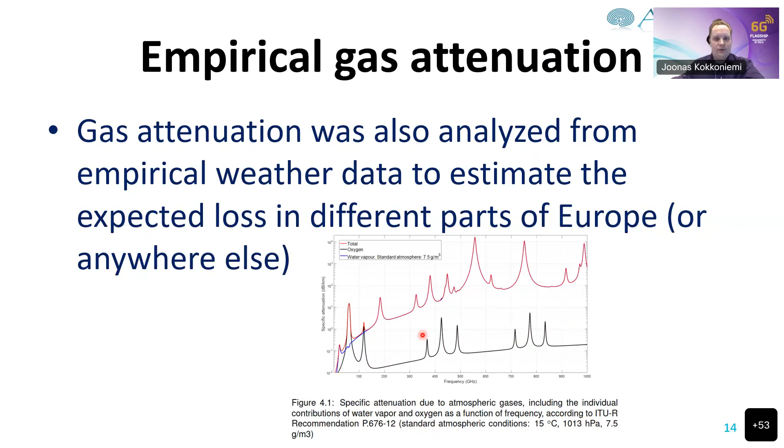But then UPM were really looking at the gas attenuation from the empirical weather data point of view. They really look into the historical weather data and see what kind of average losses we could be expecting on the long distance links. So these are mostly applied to European locations, but of course this could be anywhere on the planet. We do a similar kind of analysis. I picked Oulu because I'm from Oulu. So this is a little bit small, but we can extract weather data. This is from January 2018 all the way to January 2020.

So if we look at this, we can see that temperature, relative humidity, pressure, and your water vapor densities are changing on average. So during the midsummer, you tend to have higher temperature and higher humidity compared to the midwinter, for instance. So this will have a great impact on the specific attenuation, as you can expect. So even up to tens of dBs per kilometer difference.

Now, of course, the shorter the link, the less important this variation is. But for long distance backhaul links, for instance, we have shown in this project, but also in the previous project, that these kinds of even 1 kilometer links are possible.

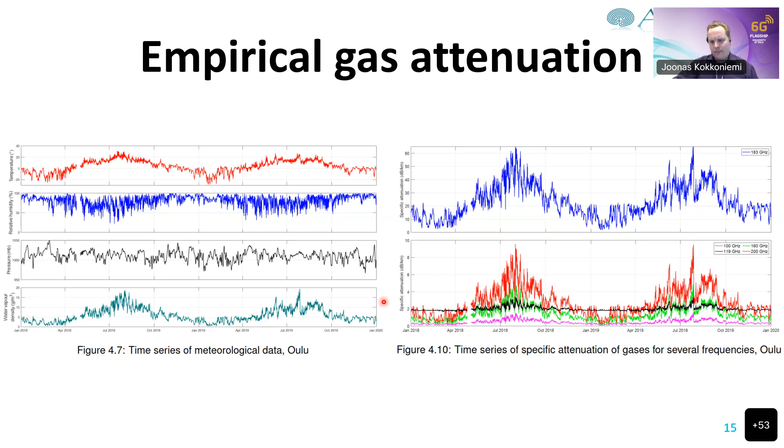Now, depending on your location, your frequency, like in the lower figure, you have the different frequencies and the specific attenuations. You can have some variations at least, depending on your location. Obviously, these are all European locations, but you can already see that there are certain drier locations, like for instance Oulu, where you would, on average, have a little bit less attenuation compared to some more humid locations. Of course, if you take this closer to the equator, rainforest, and so forth, there can be very great differences.

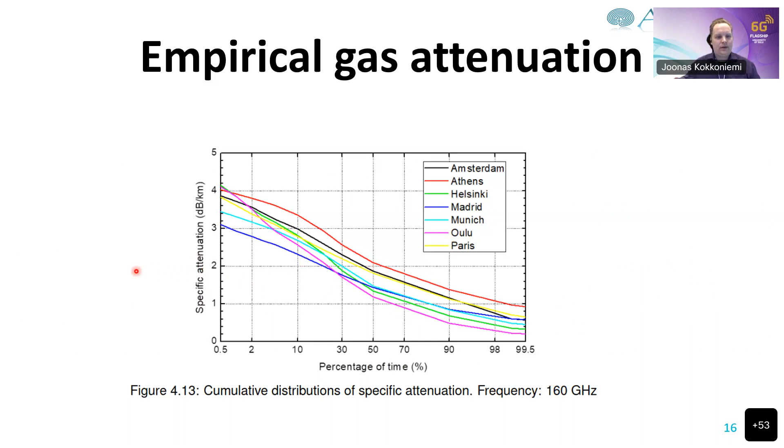So these are really interesting analyses, and you can really check more in this deliverable 1.2, where we have a huge amount of data on these.

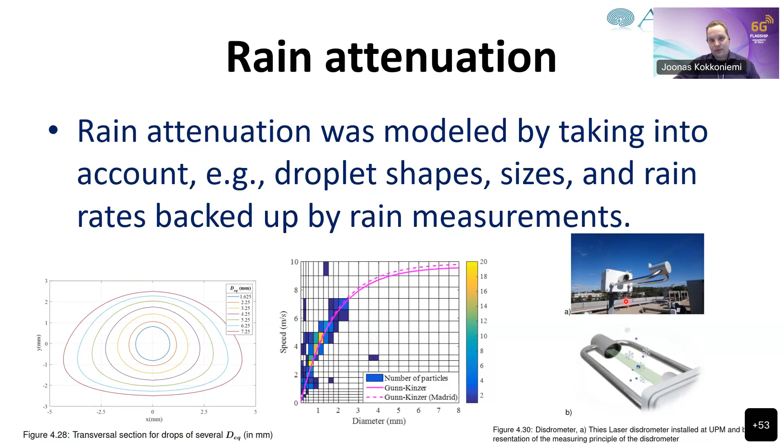UPM also checked this rain attenuation, which is a really important open question, how to model it really accurately. They were really looking into the droplet shapes, speeds, backed up with the measurements of the droplet sizes, and so forth. And they have been developing some rain attenuation models based on the shapes and so forth, theoretical and measurement-based data. Because the well-known fact is that ITU-R does provide models, and those are a good baseline to predict what kind of losses there are.

The issue is that they have really not been validated to really high frequencies. So that is an important research topic still nowadays, how to really model when we go above 100 gigahertz, what are the real losses there? Because there are different kinds of rain types and so forth. So ARIADNE has taken a step there and provided new models that are hopefully a little bit more accurate than the ITU-R models. And of course, this depends on the location. Same as the molecular absorption loss, the rain attenuation, the type of rain based on your geographical location, varies a lot.

And there's also a huge number of results in the D1.2 about this rain attenuation. So I hope that you go and check that out. It's a public document, so it should be available.

The RISs now, these are one of the focal points of ARIADNE, and we have such a huge number of results about the RISs that I really urge you to read all our deliverables about the RISs. So we are really looking into RISs not only from the channel point of view, but from the algorithm point of view, and many other points of view. Just quickly giving those in the following.

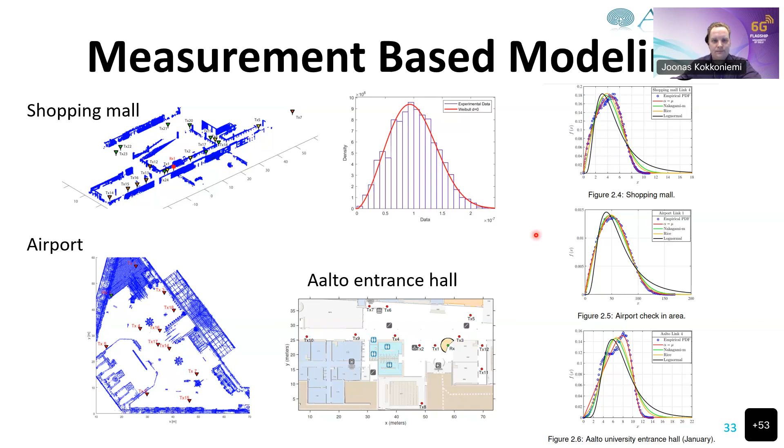Now, ray tracing is quite an interesting tool, because channel measurements are really challenging at the higher frequencies. So ray tracing will really take off where the measurements have to stop, because measurements are time consuming and difficult at higher frequency, because you always have the directionality and the scanning and so forth.

Now, ray tracing has also become more important at higher frequencies because of the sparse channels. Because at lower frequencies, the vast numbers of even smaller objects in the environment don't radiate, but scatter energy.

Exactly the same thing happens at the higher frequencies, but because of the lower dynamic ranges, we tend not to see those scattered paths. So therefore, because the paths or the channels are sparse, also a little bit rougher ray tracing models tend to give much more accurate results, because with ray tracers in general you're a little bit limited in the accuracy that you can utilize, just because of the raw computing power that you have at your exposure.

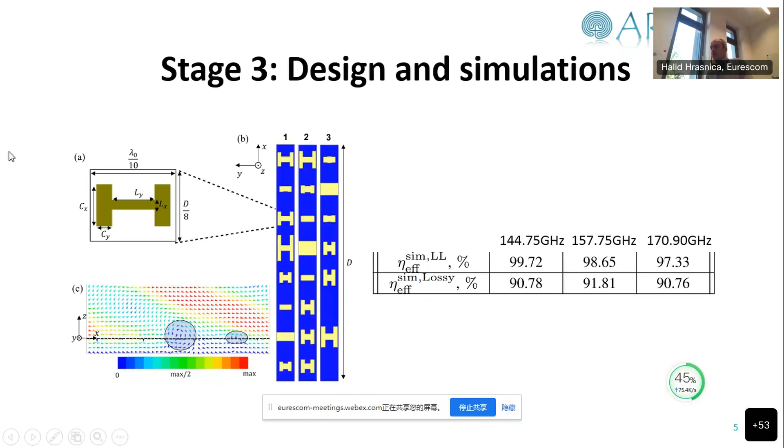So thanks again, Joonas, for your very nice presentation. And I think the continuation of our presentations today fits very well to what we just heard from Joonas, because you mentioned the channel modeling in respect to the application of RIS, the metasurfaces. So our next presentation is more directly about the implementation of the RIS as such, characterization of such panels, and also how they can be manufactured and then tested and

demonstrated. So for this task, we had, and still have, the opportunity to work in the ARIADNE project with Aalto University, with different people there. And today, Xuchen Wang, sorry for not pronouncing your name properly, will update us on the overall ARIADNE work in this respect and on the results we are achieving towards project end. So, Xuchen, please go ahead.

We cannot hear you yet. Maybe you have to unmute. Pooja, maybe you can also take a look. Can you hear me now? Oh, yes, very good. Okay. Sorry, I muted. No problem. There's always a magic button, you know. Okay, go ahead.

So today, as a representative of Sergei Tretyakov, I will present this work, which was done by my colleague Sergei Kosulnikov and also our German partner for measuring the metasurface or RIS in the real environment, indoor measurement. Okay, let me start from the beginning.

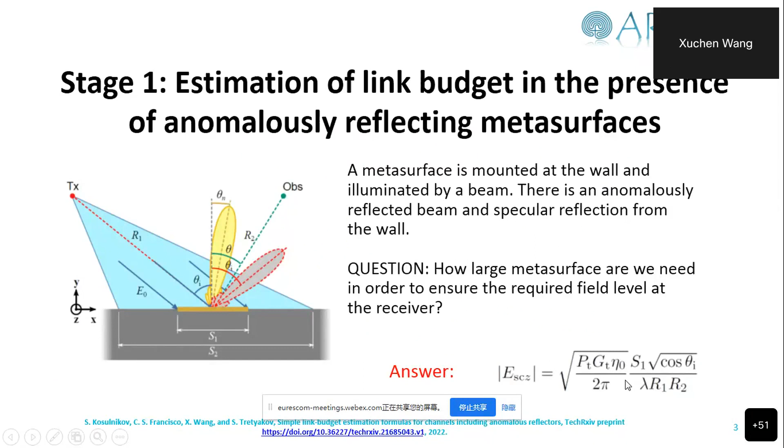Okay, so 377. Yeah, 377. Right, exactly. Okay. So, I didn't really get the idea here. Okay, maybe I will read the paper to understand better.

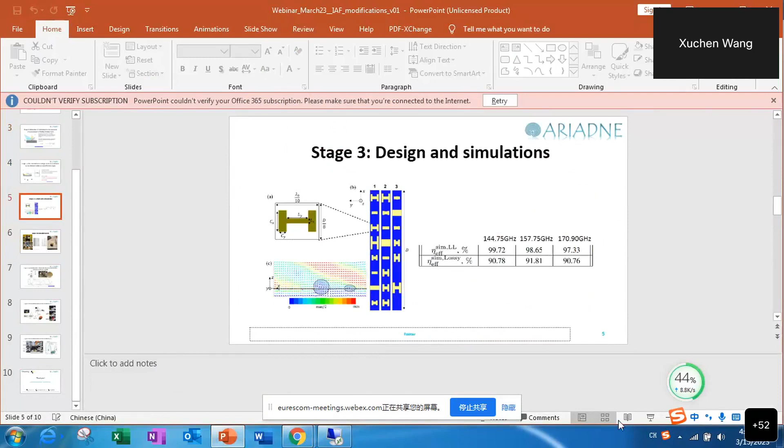So my second question is, could you go to the three prototypes, 1, 2, 3? Is 1, 2, 3 designed for three different refracted angles? No, it is designed for three different frequencies. So you see, the first frequency is 144, the second frequency is 157, and the third frequency is 170. Okay. So three different frequencies.

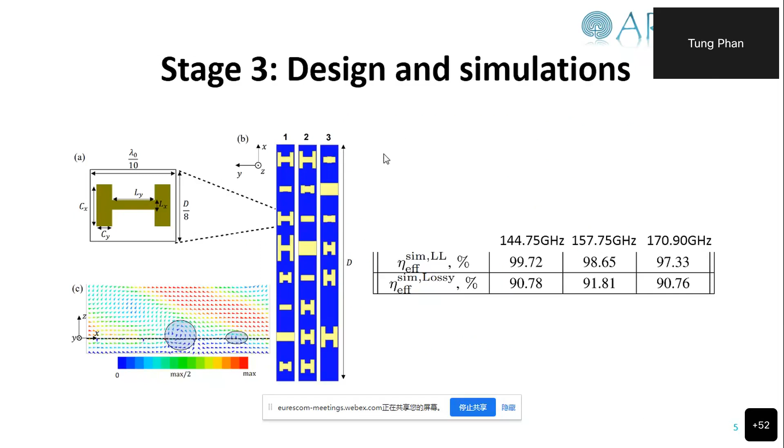So if I understand properly, now you have an incident angle of 50 degrees, right? Yeah. And what is your reflected angle? Reflected angle is 0 degrees. So this picture is like a general picture. In the real design, we have an incident angle like 50 degrees from here, and when it meets the metasurface, it will direct to the normal direction. Okay.

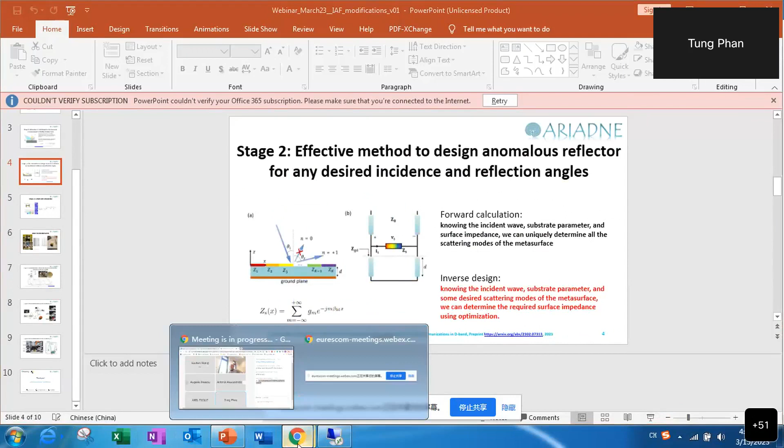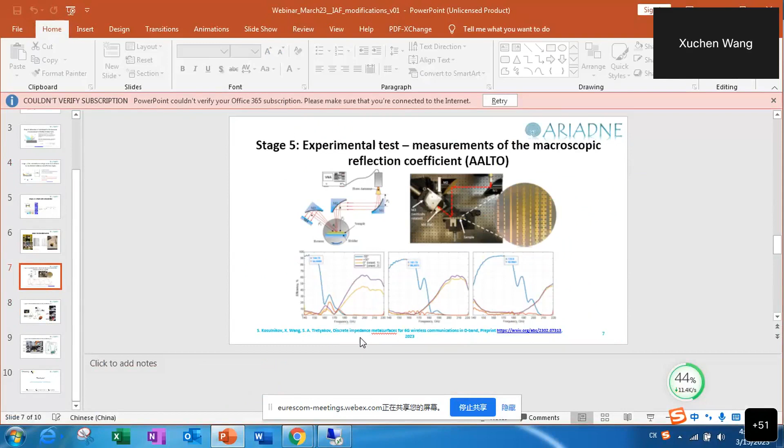My question is, this kind of design is quite narrow band, right? You mean the performance is narrow band? Yeah, because it works at one frequency, but it's not exactly at one frequency. You can see in this picture we have some bandwidth, but not 100% bandwidth. From 140 it works, and 155 it also works, depending on how you define your efficient bandwidth. If you require above 90 percent efficiency, then it becomes narrow. If 50 percent efficiency is enough, then it's quite wide.

I mean that normally in antennas we see the 3 dB bandwidth. Did you have any information about the 3 dB bandwidth of the design? 3 dB bandwidth means 50 percent efficiency, right? So you can see in this picture it works from 140 to almost 160 gigahertz, and this case works over quite a wide range. Okay.

Sorry, I have many questions. No problem, these are very good questions. One more question on this measurement. Here you have M1 and M2, and you measure the efficiency of the metasurface, the RIS you designed. Could you explain how you got the efficiency from this measurement? I didn't get this setup.

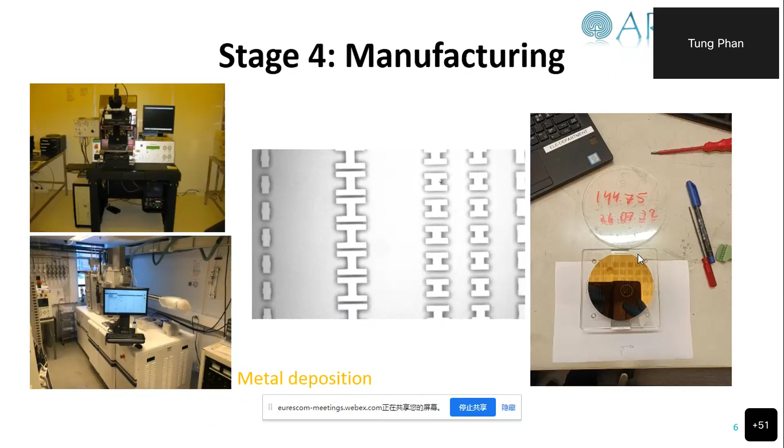Can you come back to the measurement here? No, previous. Here, so you have a distance between TX and metasurface now only 70 centimeters. So meaning that the wave going to the metasurface is not a plane wave. But in design, I think you are designing the metasurface with a plane wave. So why did you set the distance to only 70 centimeters? How do you think? Is it still well, or do we need to make it far?

This question I cannot answer you because this calculation is done by Sergei Kosulnikov. I will forward this question to him, and then he will write to you in detail. Actually, yeah, you are right. But we have an answer, I'm pretty sure.

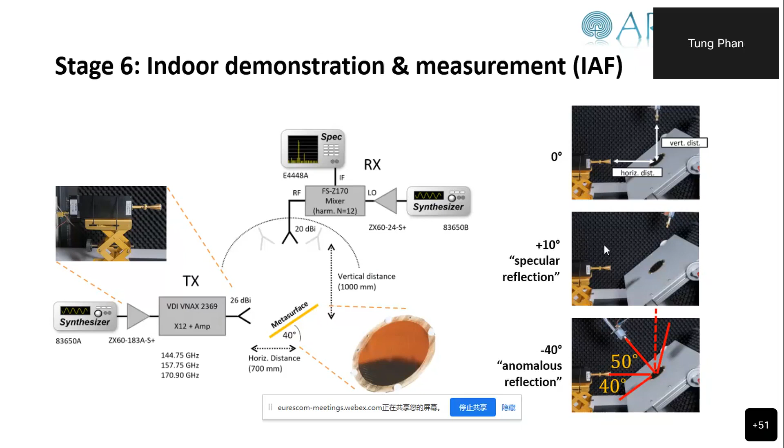Yeah. Thank you. Very nice presentation. Thank you very much. Thanks a lot. No, we are here not only to present, we are also to discuss. And there is also a question from Pooja, I think.

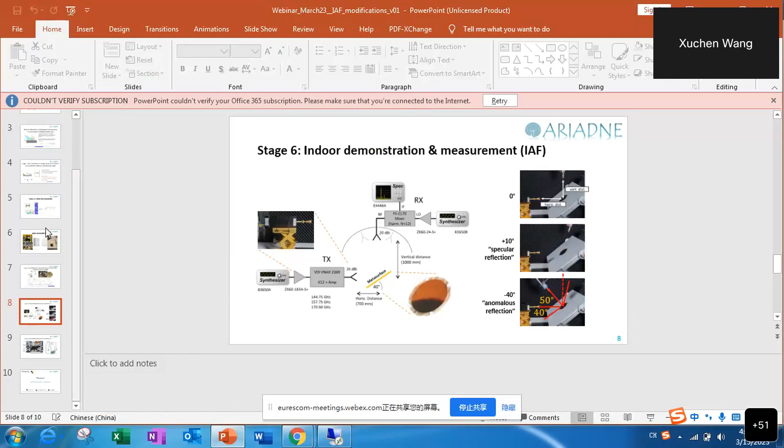Okay. What is meant by periodic metasurface? Periodic metasurface means that, let me go to these slides, the unit cell is repeating in space. So this is a super cell, and this super cell is repeating in the space here, and infinitely goes to infinity.

So normally we model the metasurface using a periodic structure. This is for simplicity of mathematical calculation, and actually this is quite a useful method. And in real fabrication, if your metasurface is large enough, much larger than the wavelength, then even though your metasurface is a finite structure, it can also be regarded as an infinite periodic structure. So periodic means that the supercell is repeating on the surface. Thank you.

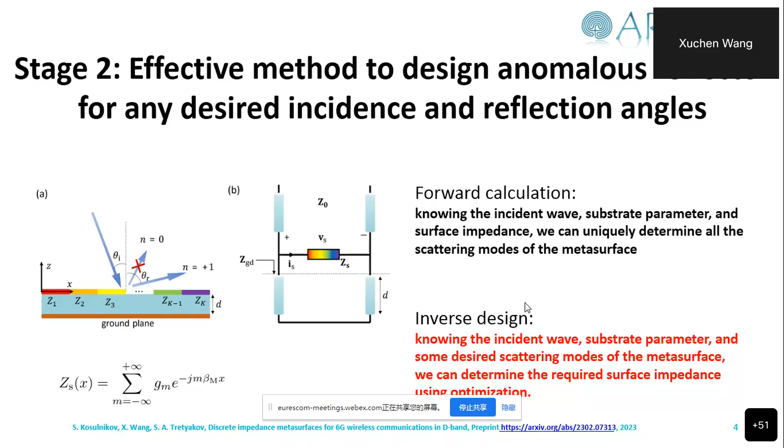Okay, thank you. So far, I can see there are no further questions. Thanks a lot again for the very nice presentation, and thank you for the discussion.

So we are now moving a little bit from the physical layer, but not completely, in the direction of machine learning and artificial intelligence. We apply these technologies to manage and characterize the networks we are working on. This presentation will be given by Fotis Lazarakis from Demokritos and also Edwin Yaqub from RapidMiner. I think Fotis will start. So Fotis, it's your turn.

Maybe Dai has a question. I don't know if it's related to the previous presentation or if the hand just stayed raised. Sorry. Okay. We are staying until the end of the webinar, so if there are any further questions on the previous presentations, we can of course take them. But let's now listen to Fotis and his talk. Okay, I hope you can see my screen. Khalid, is that okay? Yes, very good. Okay, thank you very much.

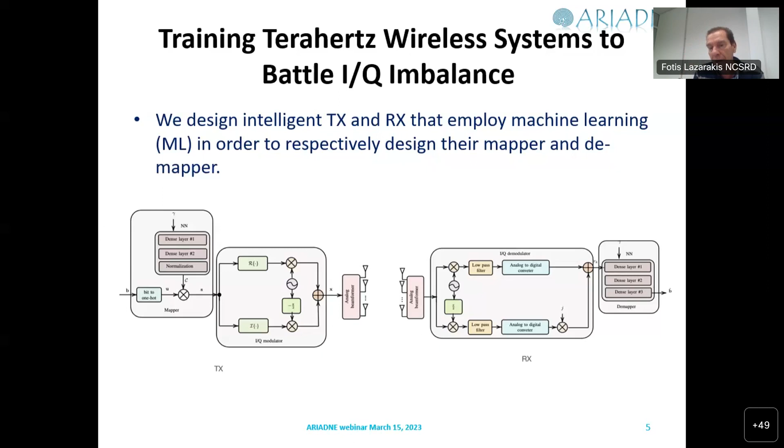One of those has to do with IQ imbalance at terahertz wireless systems, IQ imbalance at the transmitter and the receiver. So what we do is design intelligent transmitters and receivers employing machine learning techniques, and the focus is on these two blocks, a mapper and a demapper, which are trained so that they can map bits to symbols, learning from the impairments of the systems and the failures because of various reasons.

Another problem that belongs to the lower layers is machine learning application for line of sight aware connectivity, where by means of either real channel measurements or ray tracing data, we apply machine learning prediction so that we can predict line of sight and non-line of sight links in an area. As we have emphasized from the very first presentation, line of sight links are very important for the performance of the system in sub-terahertz frequencies. And moreover, this is why non-line of sight connectivity through RISs is very important in our project.

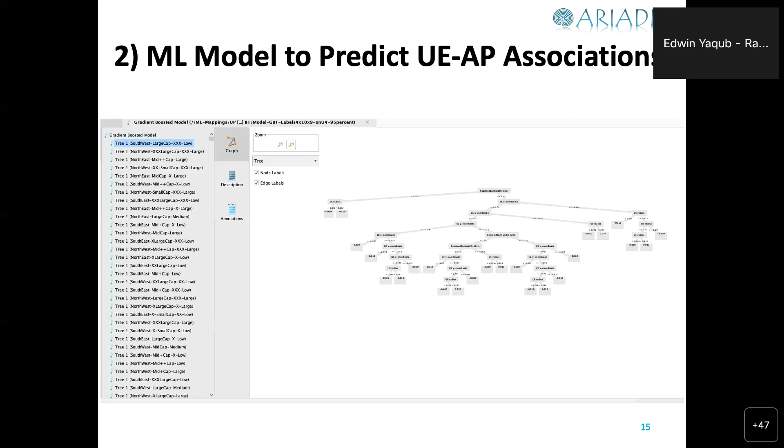We just had some intermediary results where we trained a model to come up with a proof of concept of whether the pattern really exists in the data, that is the data found by the solvers. And we were not sure if the machine learning model would be able to figure out a pattern, or if one even exists.

So we just joined two data sets, and we just trained on the minimal size of the training split using stratified sampling. Usually it is 80%, and you test on the rest of the 20%. We did here the opposite because we wanted not to overfit and also find the least subset of the data that would give us a very good accuracy.

Now, obviously, this was a limited set test, but it does indicate that the pattern exists and the machine learning models can learn on top of metaheuristics. But if we change the metaheuristic algorithm, then the pattern breaks. That was another finding. So these are the results on top of a late acceptance algorithm learned into a GBT.

So when we look at the ARIADNE way of modeling the network, there's an emphasis on mobility, because first the networks are dense, second they are evolving, and mobility and, let's say, the change in general in the network is very essential. So we identified there must be some triggers that we should be able to demonstrate, such as, for example, a network can be extended. If a new UE just appears anywhere randomly in a network, then certain UEs behind its phase or angle and behind the Euclidean distance from the AP would now be blocked potentially.

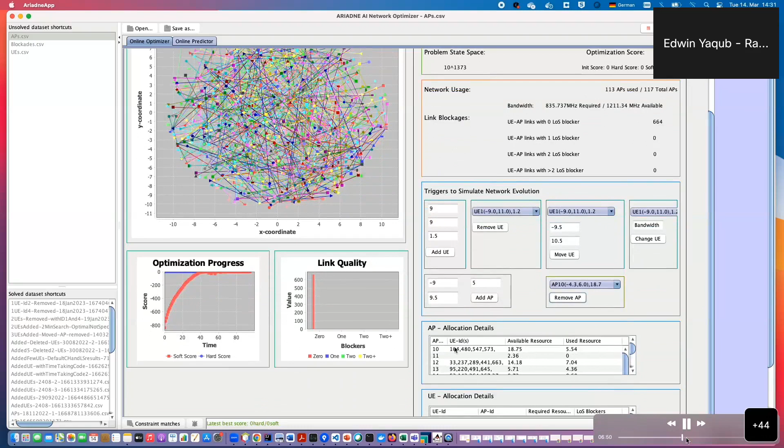So you see we start removing access points, and with the online solving, we can really show a lot of these triggers in a very visual way, and also save in the end all these changes with the ground truth data found by the solver. So if we keep on removing, at some point we are out of resources and hard constraints cannot be satisfied. So you see the combinations are found more and more, but each of these combinations is a complete solution.

So what this work helps us do is that we can get a point-in-time solution for associations in dense networks which are experiencing change. And you see at some point we run out of resources, but as soon as we add more access points, the whole network is continuously, in millisecond, microsecond ranges, able to improve its associations. And you see the results in other plots as well.

So I will just fast forward to the machine learning part to save some time. We have, let's say, now saved these. We have to save these results. We can drill down the plots and learn more. And here we go. We are in the machine learning tab now. We have trained 2 models, gradient boosted tree-based models, and we load the problem instance.

And then we can save the solutions, and we can click the predict associations button to get predictions from the model. And you will see it takes also around 1 minute, but it needs to prepare a lot of data. It does scoring, which means application of the machine learning model. So a process is called from the background, and predictions are obtained for 82,000 plus points. And this is the shape of the network after the associations are predicted.

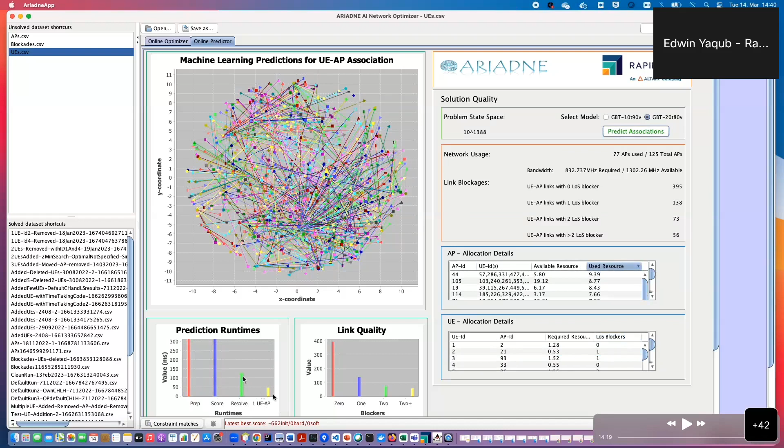And what is also interesting is the scoring time of these machine learning approaches. So when we do the prediction, we need a little bit more time, because there are 82,760 points here. But after the prediction is resolved to an access point, for a single UE, we are around 47 millisecond ranges, which is fast, but it could even be faster if we have a simpler model, let's say, performing at the same capacity as a gradient boosted tree. So after retraining, we hope that the model's predictive quality and strength and stability improves further.